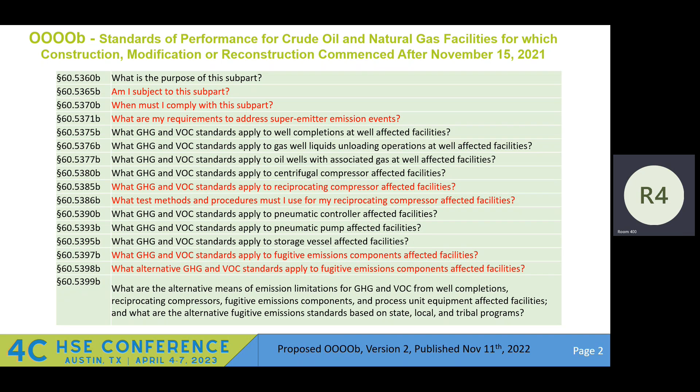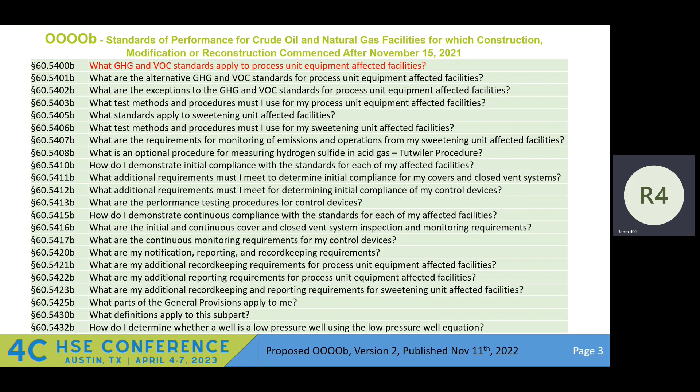And you can see all the different things on the rule itself. And I'll be handling the changes in the gas plant rule, the notorious Appendix K. This is not a talk on Appendix K. Okay, but I will give my opinions on Appendix K throughout this talk.

First thing is, are you subject to it? We got several source categories. Once again, in red is ones I'm going to handle. Pneumatic controllers, you need to be going compressed air. So if you're not on compressed air and you ain't got access to grid, you probably need to go that way if you're not already there. Like I said, I'm not going to be talking about tanks. This used to be gas plants. See, I got a pointer. Now they call it unit affected facility.

The big one, the fugitive emission, the super emitter, that's sort of different. We haven't ever really addressed that before. GPA, the production facilities were all in Washington, I think the week of the 20th, talking about that, complaining about that. So we don't know what's going to happen. Industry is against it. To me, it's a super emitter, my opinion. I mean, why fight about a super emitter? It's 3, 4, 18 standard deviations outside the norm. Should be.

But there are legal ramifications they're concerned about if other people are allowed to look at them. So as I think about it like that, they're looking at it that in the future, they may be legally required to do something, but it's still a super emitter. These are things we're concerned with. See if I hit everything.

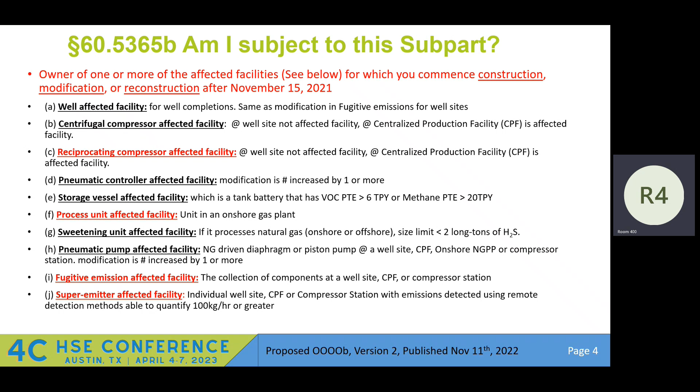Reciprocating compressors, that's the same as Quad O. We got some changes on that. Want to pay attention to that, especially if you're in the LDAR community, because there's a chance to, once again, do GHG type testing on more of a periodic basis on a larger group of components, a group of compressors.

When must you comply? Well, it hasn't been published yet, okay? And I have another slide later, but basically after it's published, that's when you're subject to the subpart, right? There are some different timings for gas plants; it still mentions 180 days, which was a gray area a few years ago. And they have a different compliance timeframe for reciprocating compressors as an affected facility. I'll be talking about them in more of a timeframe of the annual inspection that's required that is similar to the GHG testing.

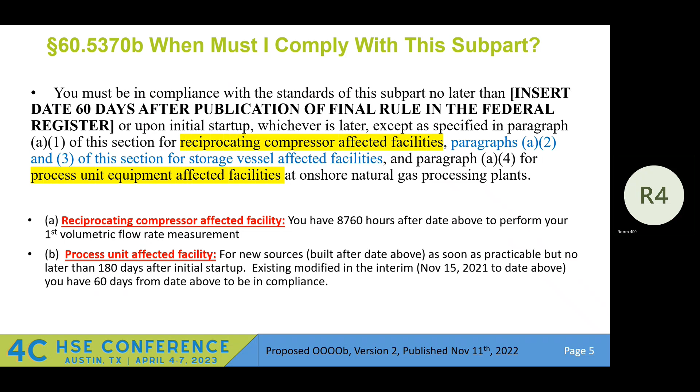Okay. Remember back when we had KKK, and OOOOa, and you could be in the same gas plant. You could be under both of them. That unit hadn't been modified, right? So it was under triple K, and then this one over here because it was modified later. But only that part of the plant was under OOOOa. So one had a 10,000 ppm, one a 500 leak definition. One we had connectors, the other one we didn't. We're running into a similar situation. Not that I would do it like that if I was a facility. I'd just do everything quarterly when we get to that point.

But this table breaks it up as far as when that facility was constructed, what you may fall under. I want to do that with the caveat that if you are oil production, we're basically talking upstream, you don't want 28 facilities that are semi-annual, 28 that are, I'll say quarterly, right? And then you got to keep track of that. And then your operations people go out there and recomplete a well or do something for a modification. You got to keep up with it. So depending on the economics, pick one is how I would run the program. And that's not self-serving just because I'm an LDAR company and I want it to be quarterly over semi-annual. It's protection for compliance. You decide the economics of that.

And in a few years, Quad Oc is going to be there. You're going to have a SIP. Everything's going to be quarterly anyway. Okay, so that is happening, probably in about 5 years. I got some slides on that in a minute.

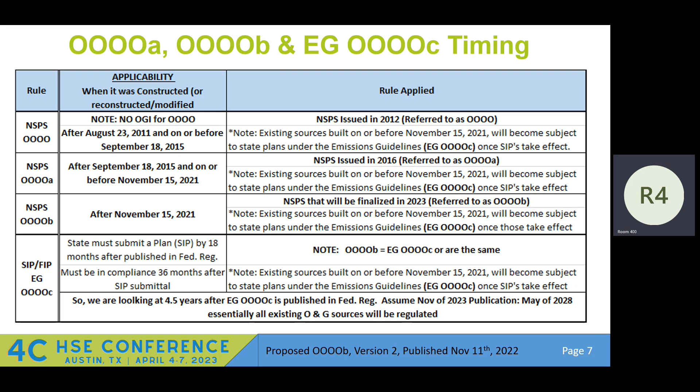The super emitters. And I am going in numerical sequence for the rule. Okay. And biggest thing is, and I have no slides on it, but if you're an aerial device, basically where this is for flyovers and satellites, right? That's what we're really talking about. And you can meet 100 kilograms. You get approved, you provide information to the EPA, and you're on a list that you can be somebody who is a reporter of a super emitter.

Okay, so that way, if that entity that is approved does their thing, how they get paid, I don't know, right? But does their thing, and they see something over the level, at this point, 100 kilograms, you then have to implement some type of initiative, corrective action, root cause analysis, et cetera. Let me go ahead next here. There's a statement in here. If you're an end user, there's statements of that, much like when we had our compliance statements for DORs, signatures required by a responsible party. So there's more teeth in it like that in super emitter.

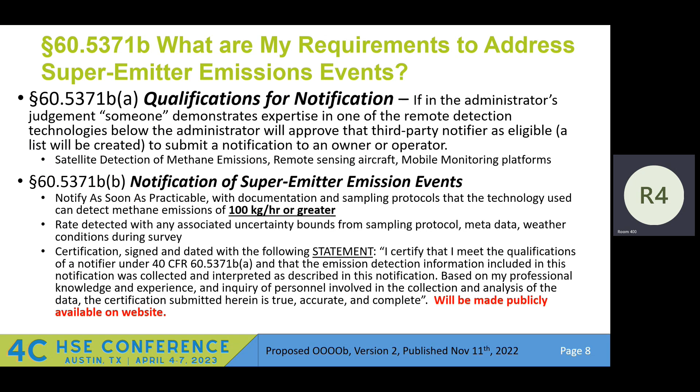If you do find a super emitter, you got 10 days to complete a root cause analysis. We all know what a root cause analysis is. Any refiners here? No, probably not. Okay. Your benzene fence line monitoring. When you find an action above a certain level, you have a plan, you have to implement a root cause analysis. So same type of thing, you come up with a plan. That plan can involve any number of these, right? It could be OGI. Basically, you're going to find the leak, fix the leak. You got 10 days. It's a super emitter. It's not when you get around to it. You take care of it. And you want to take care of it because super emitters are costing you money, right?

If you can't get it repaired, you have to put a corrective action plan, similar to consent decrees or even the fence line monitoring. Same type of analysis, root cause analysis. We can't solve it, we've got a corrective action plan. That plan tells how you're going to solve this problem, whether it be shut down. Most super emitters might be coming from a pipeline rupture or something like that. Any of these things can be fixed normally through your normal operation. You have things in place to address these issues. If not, there's probably a problem.

And then there's reporting. Does the company that finds the leak have to give us a notice in advance? Because typically we'll be done with it if it takes 30 or 40 days; it's already cleaned up and done. Why do a root cause analysis for something that's already corrected? I didn't say that. If you haven't corrected it in 10 days from being reported, you have to go through a root cause analysis and how you're going to correct it. So how long will it take for them to tell us via EPA that we have a problem? Because there's a timing thing there. Is it going to be a month, 2 months, 3 months? And they're going to say it happened 3 months ago. It's like doing a root cause analysis for something that happened 3 months ago.

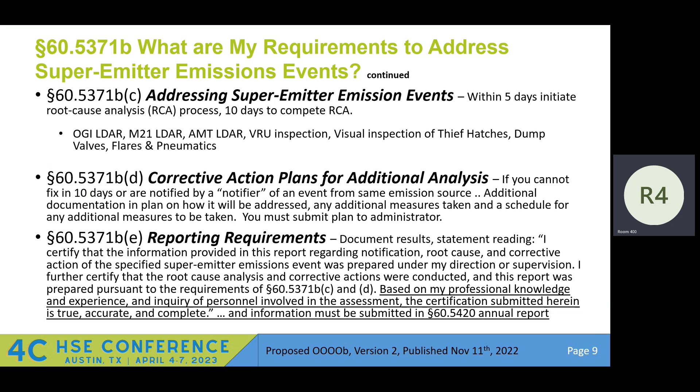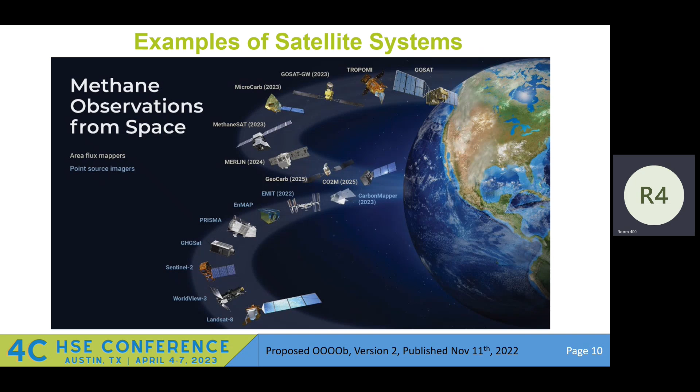So the satellite and imaging part of our business, especially on the upstream, and I'm sure the density on downstream too, that's things that are going to be more visible. Most of their business models involve working with you, but I don't know how that business model works when you report to the customer, so we'll see how that shakes out, if you ever think about the business side of it. But anyway, these are some of the satellites available now.

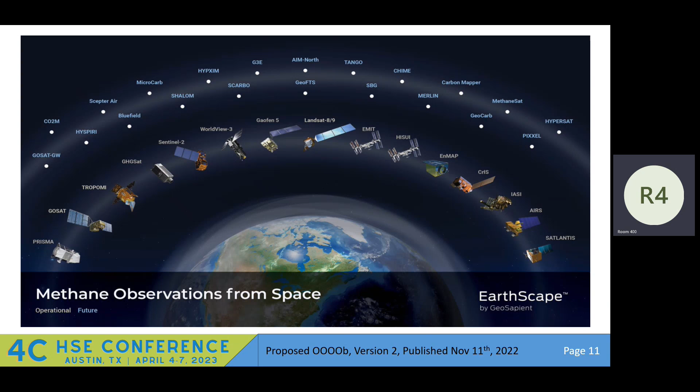This could also be a fixed wing, I guess, or a larger floating balloon, like coming from China, whatever those things are. It's an aerial kind of thing that can crawl and show that you can see down to 100 kilograms.

Through all this, I provide citations. In blue, I've got citations on the side to keep things shorter, so it's too much information unless you want to check what I'm saying. As you go, you can say, okay, that's what I thought I heard, and cut and paste. I spent a lot of time putting cross references on things like that.

The main thing we want to talk about for the reciprocating compressors: if you are a CPF, Central Production Facility, compressor station, or natural gas processing facility, there has to be an annual test done. Now, remember the GHG testing we did on rod packing vents? How many of y'all are familiar with that? Yeah, okay, it's sort of rhetorical, I'll move on. But yeah, that's what we've been required to do, the GHG testing.

From a business standpoint, we're now taking our compressor stations -- we had our gas plants and our transmission before -- so now we're going to be going to our compressor stations or reciprocating compressors that are not on well sites. Well site compressors are exempt from this particular requirement. It's a high flow sampler type of test, which I'll get into in just a second. You go out there and screen; if you don't see any emission, it can be assumed zero, much like the GHG testing.

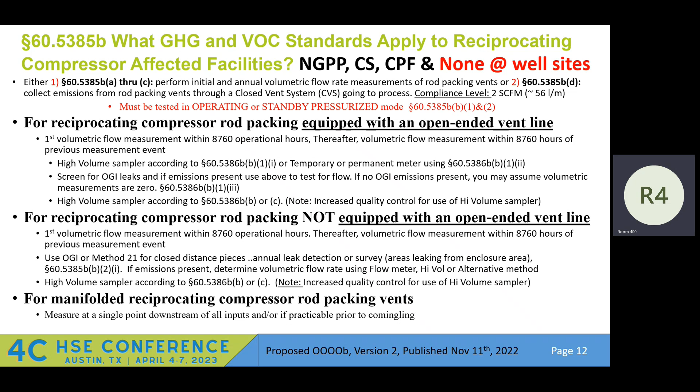It's almost identical to the GHG process, except that we have a procedure now. You can't just wing it, pull out your high flow sampler and go out there, calibrate it and go monitor. Much like back in the late 80s, early 90s, when we first had to make our Method 21 calibration sheet, we had to set up a procedure to make sure our technicians got the right information down, accounted for drift and all that stuff. So as we move forward, your companies are going to need a paperwork process to document this.

In case you don't know what a compressor is, and I do this when I train all the time, the rod packing vent is in here. That is your unloading valve, basically the packing gland there, okay? So most of the time before they went to control, everything was a little P-trap up there, a little candy cane, right?

That vented the distance piece area. So as you're going through there, you can tell your technicians and people exactly where it is. Yeah, that's a candy cane. There's a candy cane too, right? So it's in the distance piece area, not on the ends of these unloading valves. It's going to be on those heads right in the middle there. Typically they're manifolded and may go to some type of control or down to a sump for your drains, because a lot of mist can come with that as well. Anyways, that's what it looks like.

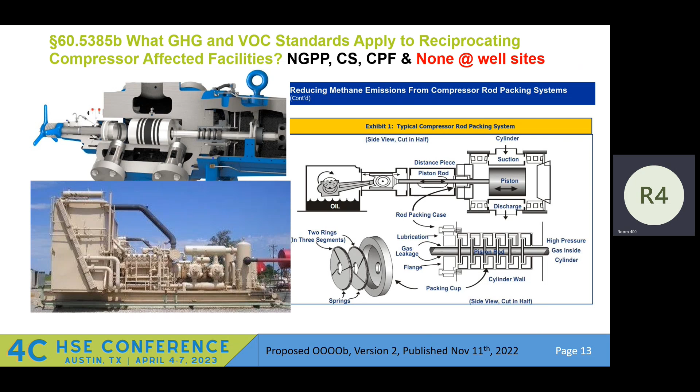Here's where I start talking about what we have in that reciprocating, I think it's 86B. Yeah, 86B talks about what you've got to do. Then it's almost like an EPA method - they tell you the method. Okay, we used to just do the GHG method, just rock and roll through it, calibrate it, write down the reading, and we're good. Now we have all sorts of procedures.

You actually have to have an SOP, put in an appropriate monitoring plan, and here's the citation. So this is where you can check that type of stuff. So when we start setting up these SOPs, or make sure your vendor that does the testing has those SOPs, we need to make sure we have that, I guess. As a company, that's what I'm evaluating.

Now, how do I go out if I'm going to do this once it's done? Make sure that I'm not putting my company at exposure or compliance exposure, because if you're not following the rules, you didn't do the test. Anyway, if you're in that part there, you want to focus on these particular requirements or SOPs for the actual rod packing testing.

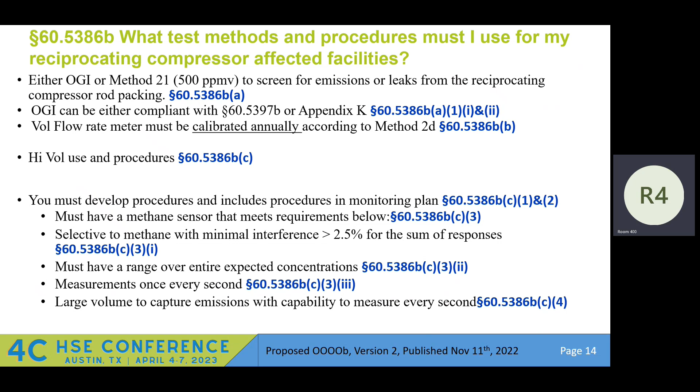And remember, just like the GHG, you only have to test it. If you look at it with an OGI camera and it don't show up, it can be assumed zero. It's zero, move to the next one. If we do see some with the OGI camera, we have to implement some type of flow and concentration, or high flow volume sampler, feed tube, and there's several methods in there, right? But here's the high volume sampling method.

And just more on the reciprocating, it's new, right? All these procedures here, and there's the citations for each one, basically show making sure it works on a periodic basis, right? We have sampling procedures. We have to get a background, for so many minutes. So there's steps, little sections of your form for performing that work to make sure that we comply. Then there'll be some readings, how to calculate it, subtracting out background or not, 3 samples, 1 minute.

So whoever's doing that in your company or your vendor, you might want to look at the form. And once we have one form, it will be copied by everybody eventually, just like our method 21 calibration forms, right? And we'll know we're good. So it'll take an iterative process, but this is fairly new. I've been looking at it and I'm like, okay, I'm gonna find time to do that, right?

Let me go back one more time, see if there's anything else on the floor. If we do all that work, will it take care of our commitments that we have to do too? Yes. Okay, good. So yeah, just like the big guys in with federal and state rules. Can we get a 2-for-1 deal? Yes, if they follow that procedure.

Now, what I expect, and I've talked to some other people, please comment if you've heard different, is, well, they've refined, just like we got the candy cane, which eventually will be migrated and everything. This will probably be in the revisions coming up for GHG. It makes sense, right? They want better quality data. Even in this one here, we can't use the old high flow sampler. It's got to be a methane specific one, right? I commented against that. It's a VOC rule, and here we are having a methane specific requirement.

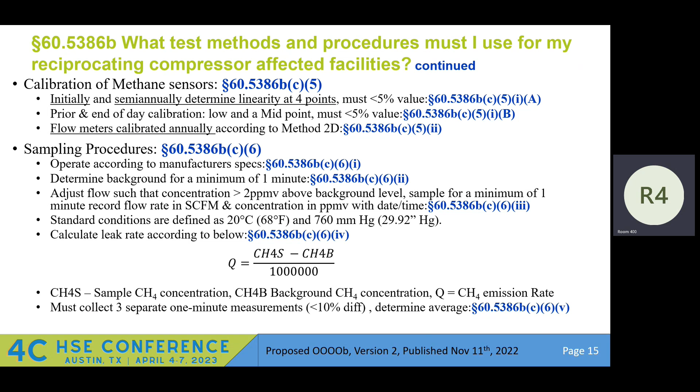The other one's pretty much the same. First iteration, as I started moving into the fugitive emissions part, my first thing is, okay, there was talk. I need to make sure I know what a fugitive emission is. We changed it. We had an old definition, we got a new one, right?

When I compared the two side by side, like I do here, it looks like pneumatics are leaks now. Remember, we had normal operations, not considered a fugitive emission. That is not in there.

At the same time, we're being pushed by state rules, federal rules, zero emissions for pneumatics. So back to what I was saying, if you can go to compressed air, it's not an option for gas plants. If you're near a grid, electrical, most of my customers are telling me they're already switching to compressed air, putting the headers up.

But from a fugitive standpoint, we don't get the normal operation type of thing. So by not having it, we would assume that if your pneumatic controller is emitting, it's a leak, even though it might be operating right. So that's a gray area. I commented on that as well.

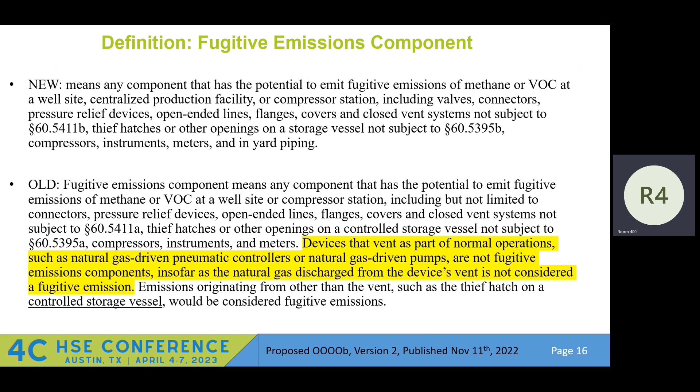Okay, fugitive emissions. The biggest change, I'll say that a lot, is as opposed to just well pads and compressor stations, we now have 4 types of well pads and compressor stations. We got really, really small ones, okay.

And then what's the small sites? Then we have single wellheads or small sites, which we have a definition I'll get to in a second, and wellhead-only sites with greater than 2 wellheads.

And they make it more complicated, don't they? I mean, we have 5 different iterations of it. Here's a definition of central production facility.

That's important because if you take product from off-site, I'll say off the tank battery, send it to a central place, you have to do your reciprocating compressors. If you're at a typical tank battery where your 6-pack or 12-pack is all on the boundaries of the foundation, it's not a central production facility.

You don't have to implement a program because reciprocating compressors on well sites are exempt from those. So knowing your definition, and typically if you're operating the same, you're doing individual batteries with 12 packs, 6 packs, whatever they are, 3 packs, or you're having a field where you're bringing it in.

So you know how you operate, if you have an exposure to a central production facility, and it's if you're bringing it from off boundary.

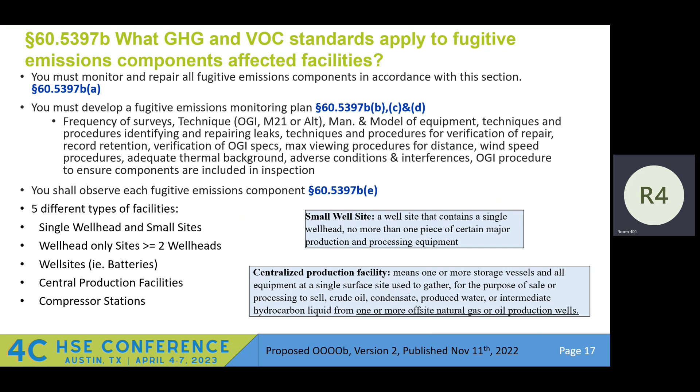Try to break this up into a thing. We have AVO inspections. That's also new, required AVO inspections, as well as a frequency of an OGI, right?

So initial surveys over here, oh, I can point, I'm sorry. Over here, initial surveys are AVO or OGI, depending on one of those 5 particular stratifications. And then your periodic inspection, AVO frequency here.

Instrument inspection, if you're a single wellhead or small site, you don't have a visual, you don't have an instrument inspection. Instrument, I'm saying OGI, right?

And if you're small, basically you're semi-annual, then well sites went from semi-annual to quarterly. So if you're an upstream facility, you doubled your cost just on that aspect.

Whether it's in-house or out-house, however you want to say it, or using contractors, functionally, your work has doubled. There may be some efficiencies based on counts and things like that, but it's doubled.

And then we got quarterly for CPFs and compressor stations. The time change between inspections, it's not codified for AVOs. So you could do an AVO on the 31st and an AVO on the 1st to comply with monthly.

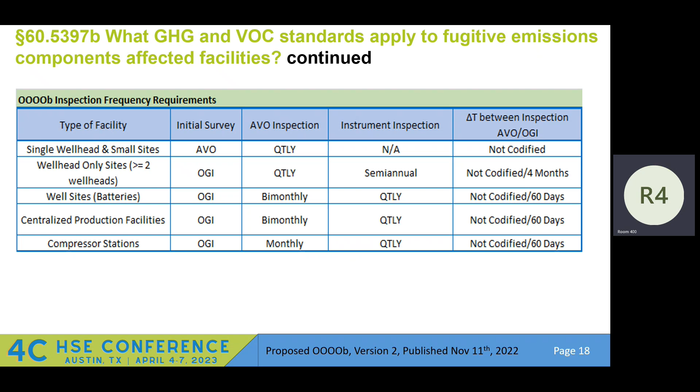Can't do that for OGI inspections. OGI has a minimum time frame between inspections. How am I doing for time?

20 minutes left. Okay, then we have repair and verification requirements. So one table is our inspection requirements, one table is our repair and verification, and then final repair.

So I set this up into 3 tables because there's different time frames upstream. Okay, here's our AVO first repair.

If you find an OVA, AVO. OVA, remember those that you're old enough to? Who's old enough to remember what OVA is? Yeah, your visual inspection leaks is our first one, 15 days after we find it.

Okay, so we've got a first repair attempt. Final repair is 15 days after the first. That's a shift, because if you've been in LDAR for years, the final repair wasn't a function of the first repair. In upstream, that time frame can change. Like the old days, if you had 30 days to repair it, I would say don't repair it till the 30th day.

So we got 60 days total to do it. You worked your system, right? So here, those time frames are a function of the previous event, which is off the first event. So it can piggyback on each other. Same thing for instrument inspections. You know, within 30 days and 30 days after this attempt. Once again, so we could go 60.

How you play with that's up to you, but, yes, Mickey? The rules don't provide any accommodation for continuous monitoring as a substitute for OGI, for the periodic OGI inspections.

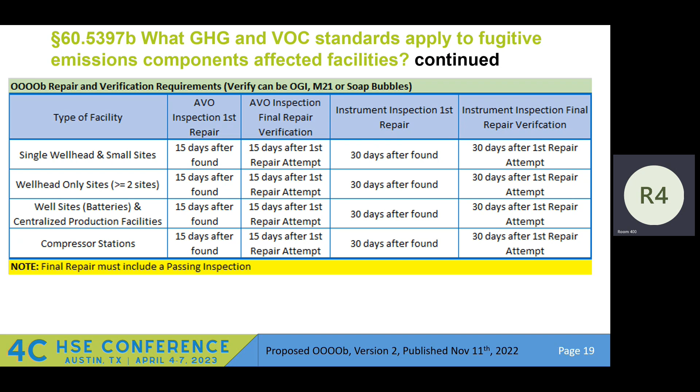And then make sure you understand, you know, putting things on DOR. I've been in this for a long time, gas plants, and I'm not throwing any arrows at you, but they used to be real bad. Everything went on DOR in the 90s, right? Couldn't repair it, put it on DOR. Try to be a little better than that. That's exposing you. So know when it's technically infeasible, when a blow down maybe, or things like that.

So the effort should be to try to fix that within the time frame. You're getting 60 days, possibly 30, maybe plus 1, or whatever that adds up to be. We have more time. We know where our problems are. So my advice is always avoid delay of repair. May not be able to, but those are bad.

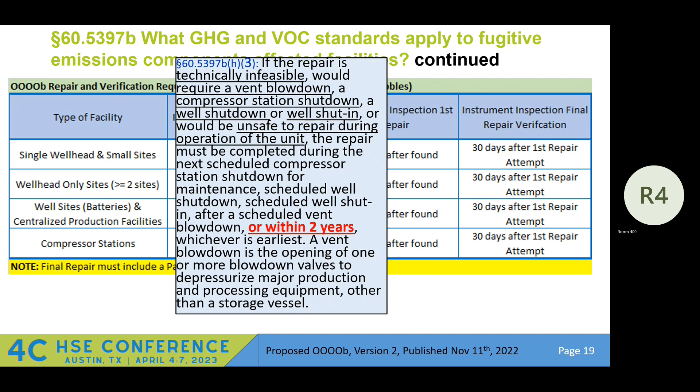There we go. Okay. In this rule, we're providing some alternatives. In the previous rule, we talked about it in text, but it wasn't codified. They wanted comments. And if you ever went to the docket and just put in continuous and searched, there's a lot of comments. I think there were over 4 million, I can't remember the number, but the number of comments for this rule was crazy, all right? And you could actually search the docket by word.

Over 1 million? Over 1 million, that's what it was? I'm a fisherman, I'm exaggerating. Next time, tell the story, 5 million.

So basically, we have two options, a periodic and a continuous, okay? So we have two that are codified as being an option not to do human-based OGI. Okay, they may change, right? Because if I'm an LDAR company, I'm saying, no, you don't need to do that, that's costing me money, right? If you're a periodic inspection company that does flyovers and things like that, I'm saying, if we're doing this, we're good.

You don't need to do your annual OGI, right? Because that makes our economics work out. Everybody has an angle in this world, right? But the big thing is, it's happening. Just like we had kiosks. We didn't have kiosks at Walmart, Home Depot, etc., and we complained about it when we first got them. Now I get mad if a kiosk is closed. This is the way the world moves. We're going to be automating.

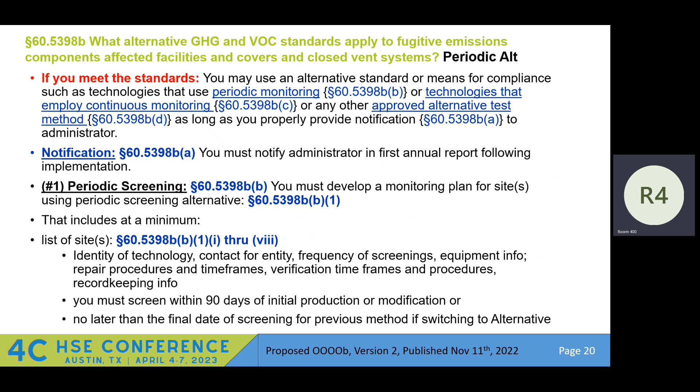So, moving on. With these procedures, I want to go over this. There's a frequency based on your resolution. What I mean by resolution is how well you can see it. They're listed there. If you were quarterly, in this case that's your well pads, compressor stations, and CPFs, and you can meet this criteria, you can go according to these frequencies. And if you were semi-annual, same type of thing. I've done the math in my head. I didn't necessarily understand how I can go to 4 kilograms and go to monthly, but there's a method to their madness, right?

To me, the point is, why do we have 5 stratifications? Pick 2. Maybe pick 2 kilograms or less and above. All these stratifications just, to me, make things more complicated. Either you can see low stuff or you can't, and then we have a frequency based on that. If you can only see 30 kilograms per hour, you're not going to be a solution, right? So I commented on that. I said, that's ridiculous. Break it down to 2.

Go ahead. So your monitors are concentration based, basically. How do you get to a kilogram per hour? Okay, what we do is we go out there and we put a mass flow controller on a cylinder. And then based on the flow rate and molecular weight for pure methane, we know the kilograms per hour. They use that because we really do concentration with OGI and imaging situations. So even with AWP, we've always gone to grams per hour. So I think that's how I process it in my head.

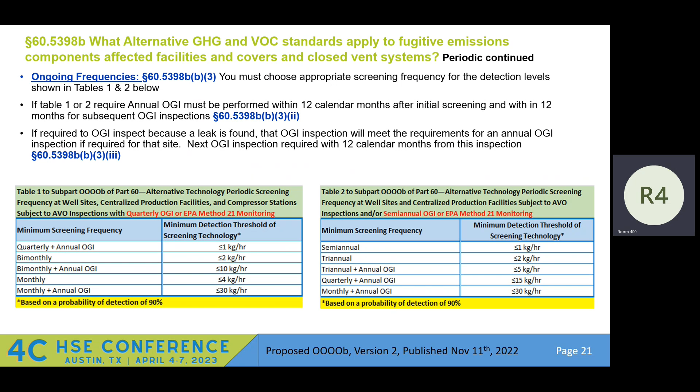What they don't do, okay, see, and there's a frequency on that. Okay, yeah, next one. What are they fighting?

Okay, the biggest thing if you go to comments is they're fighting right there. They're saying, if we can resolve 1 kilogram or some number, they don't feel it's valid to require an annual OGI, or excuse me, a complete OGI of the whole site, okay? Because they say their granularity can take you down to that piece of equipment. Good enough? Okay, I don't know.

To me, it does away with OGI. I'm like, look, whatever, you know, what do I do? However that shakes out. They commented one way. If it catches traction, the annual OGI may go away, and the cost analysis of moving to a periodic is there.

One of the reasons they may have argued it, and we'll get to it in a second, is the continuous: when they find an issue, an action level above there, it's written a little different because it's continuous monitoring. There's no complete survey required. You just have a root cause analysis and you solve it, and it's shown by the continuous inspection of the leak, right?

So that may have been what prompted them to really fight hard about that, because it needs to be economically viable. In the end, if it's a good solution, we got to be somewhere equal in cost, or we got to prove value and safety or something, or the magic spice that makes that technology better than the other one.

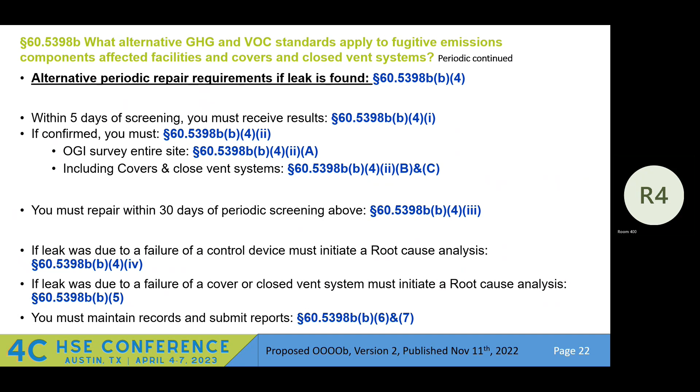3 minutes. 3 minutes. Okay, where am I? Doing good.

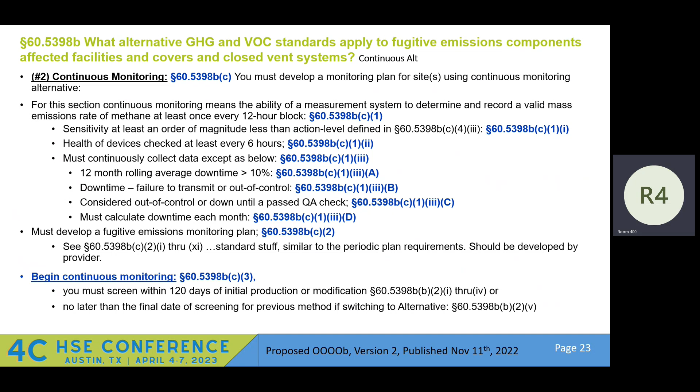Continuous, same type of thing. They will write the plan. The big thing on continuous is right here. Here's the frequencies or the levels. Okay, so away from a plume, you have to be able to resolve certain levels on a rolling average. Interesting thing here.

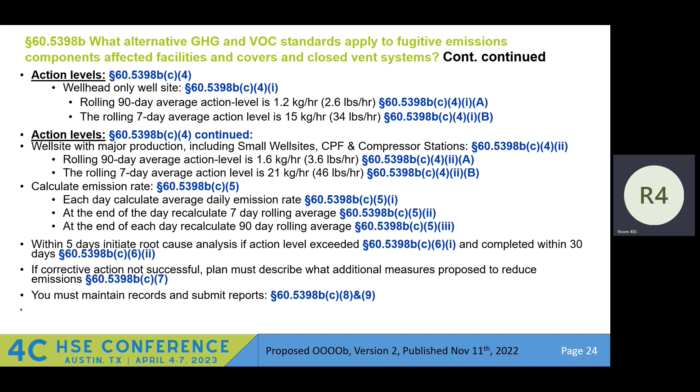If you take 90 days, divide by 7, you get 12.1 something. You divide 15 by 12.1, you get 1.25. So if you get a 7-day rolling average, you're going to have a 90-day. It's almost impossible because of the rolling average, right? Other than that, the other calculations go the same, and the calculated emission rate, once again, will be in the plan.

Process unit affected facilities. The big takeaway here is Appendix K. Instead of using an AWP or Method 21, BSER is now Appendix K. As an alternative, you may use Method 21. Everything else is pretty much the same. Appendix K, what I've heard from industry, they're not going to do it. Even if they were doing the AWP, they're going to go back to Method 21. We'll see where that shakes out, if there's any changes that make it less burdensome on them.

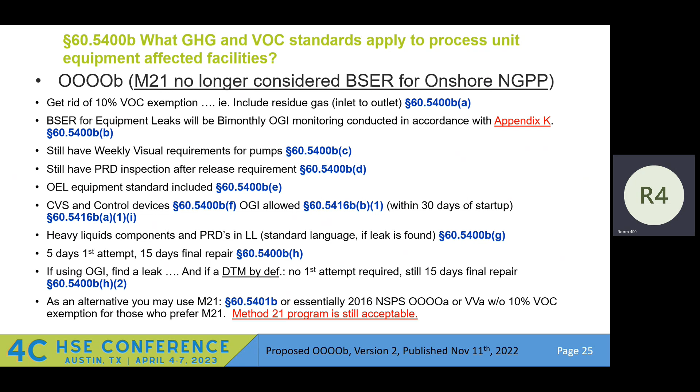Okay, review. Overall, we have more frequent AVO and more frequent OGI for upstream. Taking inspections cradle to grave, because there's a section I skipped through that talks about well closure, right? You have to inspect to well closure. So cradle to grave. We have a super-emitter rule. We'll see how this shakes out. Industry's fighting it hard. To me, it makes sense. You got a big leak, find it.

Rod packing vents annually. BSER is Appendix K for NSPS. To me, the biggest impact to everyone will be Appendix K. And I am done. Oh, here's the thing. Over 1 million O&G sites, Google says, and they will all be regulated by 2028. So individual sites, not wells, sites.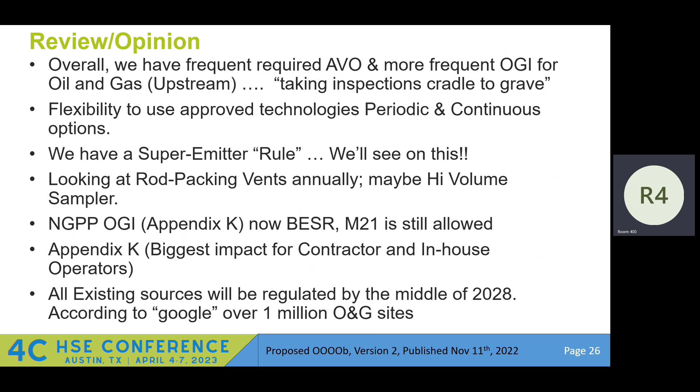I knew I always go long. You did good. That was quick. Did it? Well, the thing is, I wanted the content so people could download it and use it if it's valuable. Okay. Yeah, I'll go ahead and get it for you. I was just going to eject the USB. Got you. But I was closing all your stuff, huh? About to, but it's okay. I think it does everything automatically anyways. You're good to go. Ready? Yeah. How'd it go? I always get long-winded, but I think